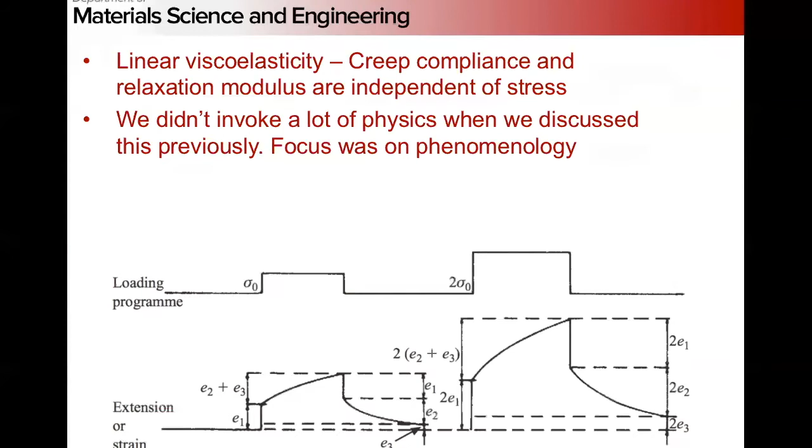And we didn't really discuss it before, but this rubbery plateau is really a function of the structure of the polymer, particularly molecular weight, right? If we have long molecules, right, they're going to tend to entangle, just as we talked about when we were discussing yield in polymers. And this is going to give the formation of physical links that restrict the molecular flow through the construction of these temporary networks.

And remember back when we did rubber elasticity, we said not all crosslinks are created equal, right? Some links are temporary slippages versus pure chemical crosslinks. And we discussed how modern rubber elasticity theories like the Boyce-Arruda work and the Ball, Doi, and Edwards models accounted for this, whereas the Mooney-Rivlin model that we talked about and other models assumed a fixed distance between these crosslinks. So it all ties back to our theory of rubber elasticity and our theory of polymer yield and flow.

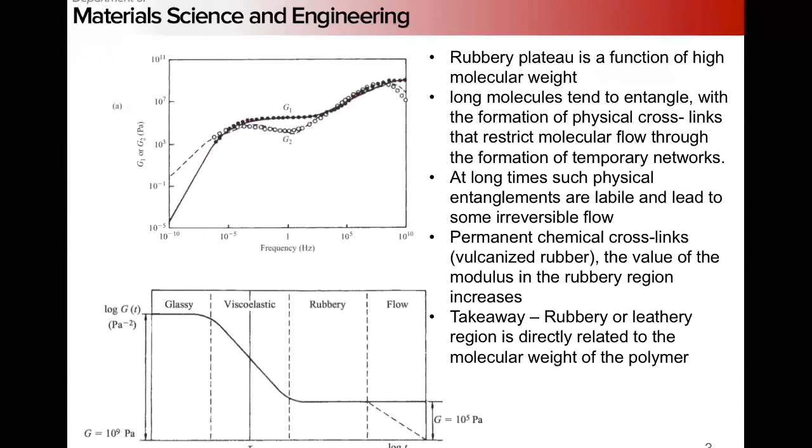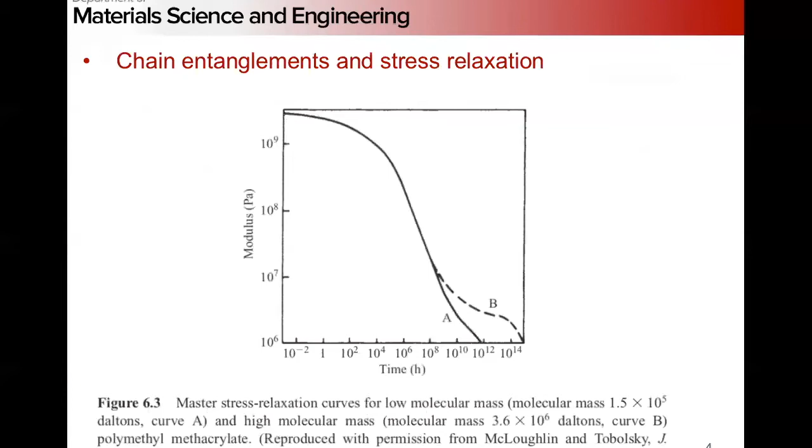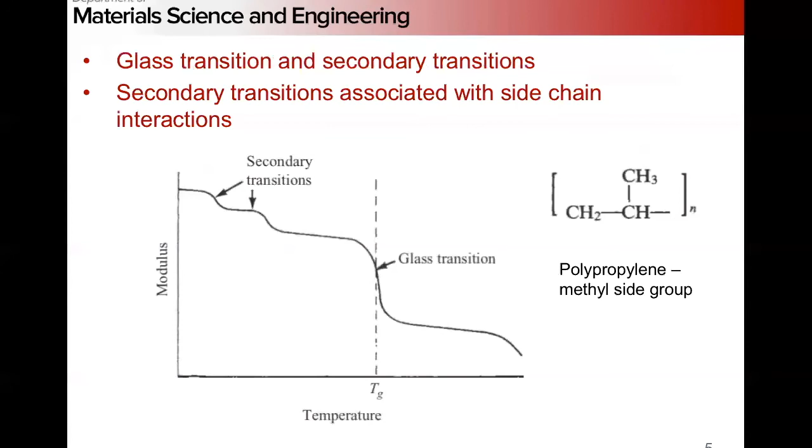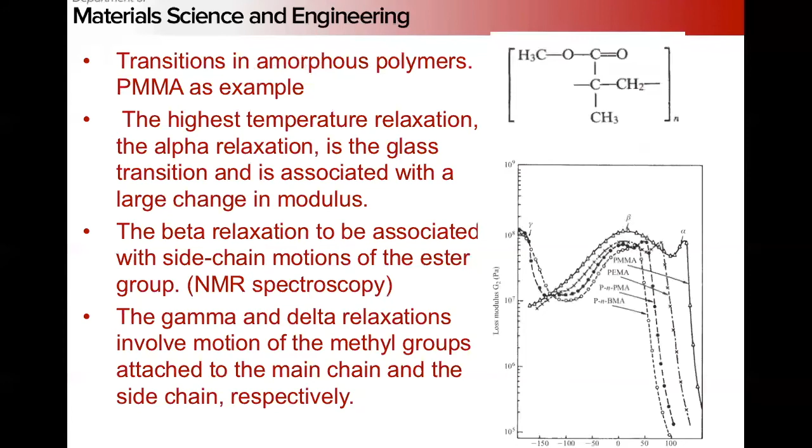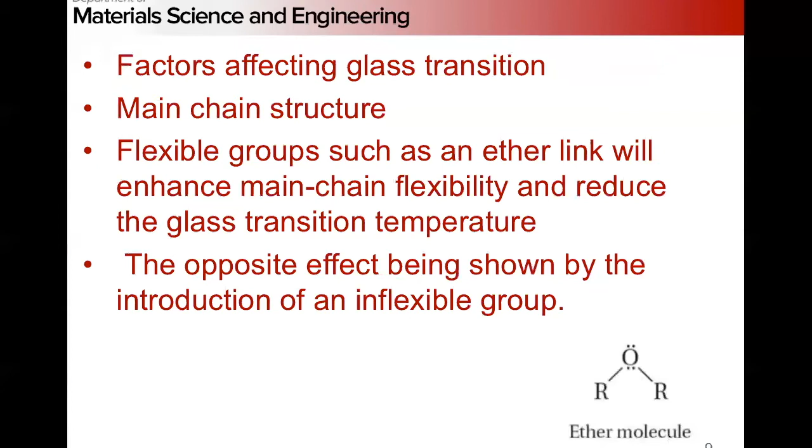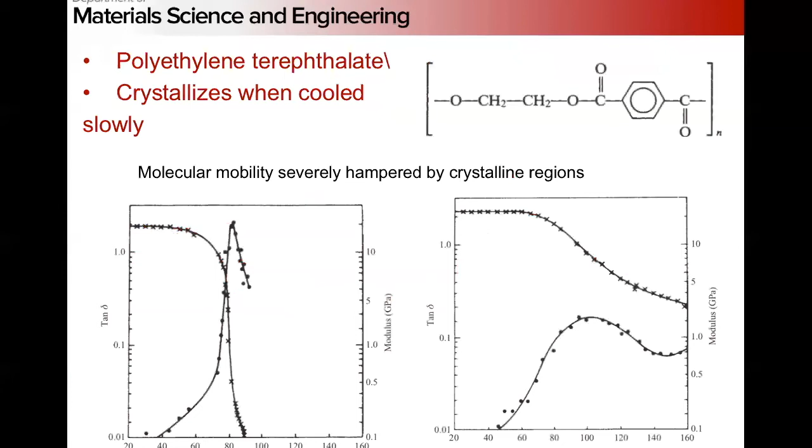So you've got that oxygen with two side groups coming off here. This has a more significant degree of freedom than these terephthalate type structures, where you now have these big benzene type rings. This gives you a more rigid polymer chain, and is going to have a higher glass transition than a more flexible chain.

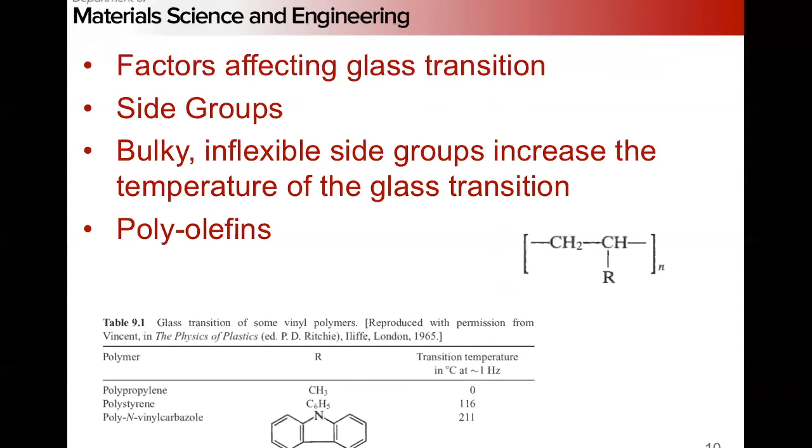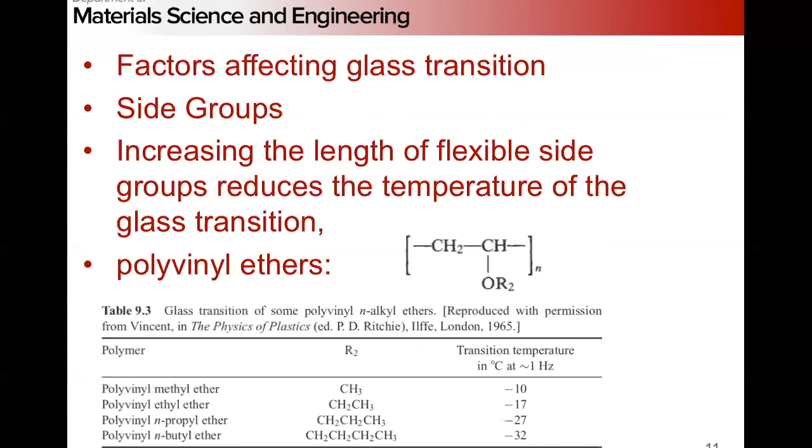And so basically, as we increase the number of these chains, we can increase the number of methyl groups in our side chains, and we can reduce our glass transition. Of course, it's going to depend on the structure of the main chain itself and the structure of the exact side chains, how drastic that effect is going to be.

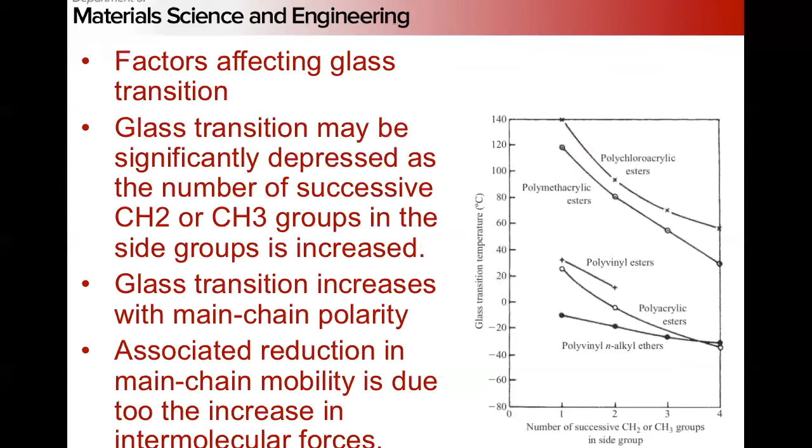The last structural thing we need to worry about is the main chain polarity, how polar the bond is. Polyethylene, for example, is just carbons with a whole bunch of CH2 strung together, very nonpolar. So we're going to have a lower glass transition than something that has higher polarity, stronger intermolecular forces, which gives us a decrease in chain mobility and an increase in the glass transition.

Okay, so I don't want to embarrass myself more by going into deeper details of polymer structure, other than those main trends to keep in mind. But in reality, it all comes down to the simple idea that the more interactions you have, the harder it is, the more likely you are to form physical links, the higher your glass transition temperature is going to be. The more flexible and easier for the chain to move, the lower your glass transition temperature is going to be.

Okay, so when we talked about viscoelasticity, we did not explicitly talk about temperature dependence at all. So here we need to bring that in. There are some practical and scientific aspects of the temperature dependence that we want to think about. From a practical point of view, it's typically not possible from a single experimental technique to measure the complete range of frequencies to evaluate the relaxation spectrum at a single temperature.

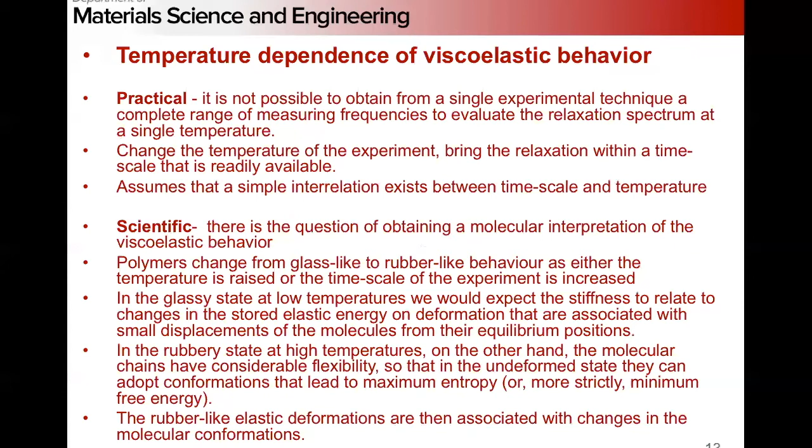So we have to find something that balances these two considerations out, right? So in this rubbery-like state, our deformations are really going to be associated with changes in molecular configuration or conformation. I have to be careful because configuration and conformation mean very different things to polymer scientists.

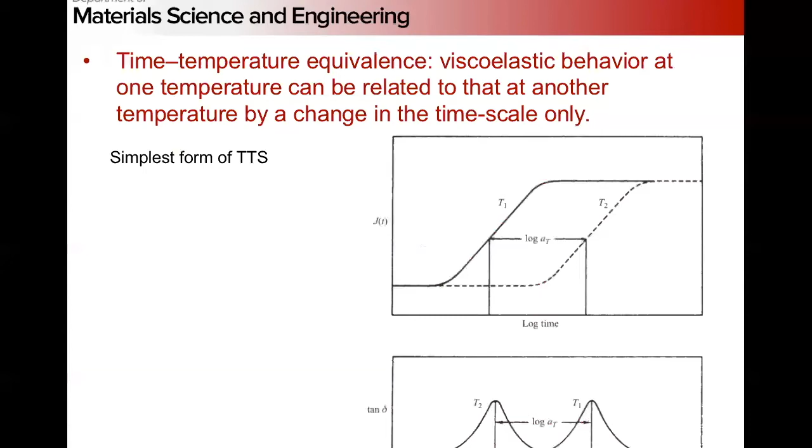Think about it for a second. Do you expect it to be more compliant at higher temperatures or less compliant? More compliant, right? So a faster creep deformation at higher temperatures.

So basically the idea here is we measure the compliance as a function of time for multiple temperatures. These curves can then be shifted to where they overlap and plugged together to form a master curve. Then, based by the amount that we have to shift these to bring them into coincidence, we know what the shift is going to be as a function of temperature, how we have to move this curve as a function of temperature to get our creep compliance for our temperature of interest.

So we want to record this variation of the shift factor with temperature, because this is an important validation for whatever theories that we come up with, right? Does our shift going to match what was observed experimentally?

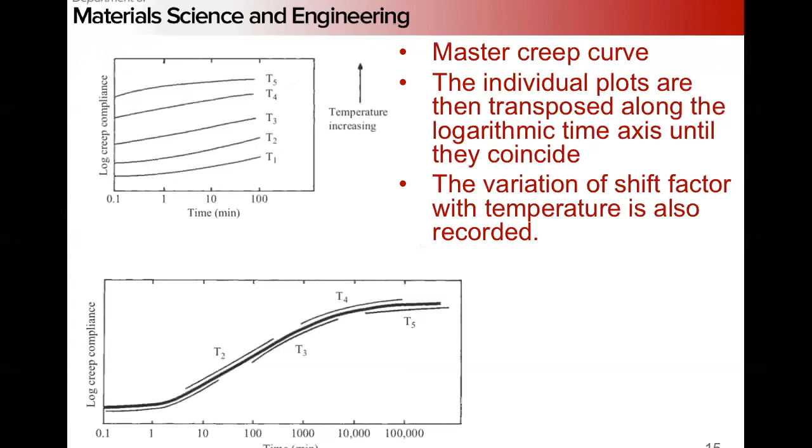So how does this work for polymers? It's pretty easy to think about in metals when we're talking about diffusion creep, in terms of vacancy diffusion, hopping from one atomic site to another. It's a little more abstract when we're thinking about the motion of these big molecules, these big sorts of changes.

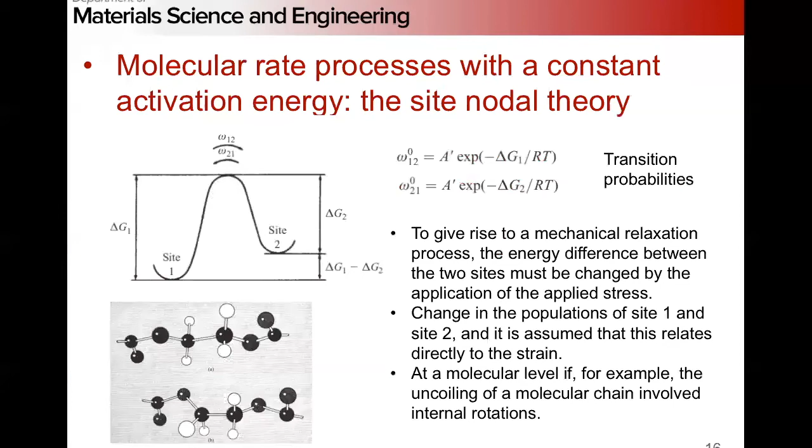Okay, so we're going to do a little bit of algebra now. So if we assume that our applied stress causes a small shift in the free energy - this is our free energy change, this is our applied stress - this parameter is going to have the units of volume to make everything balance out.

But we can rewrite our transition probabilities in terms of the stress. And now we can go through just like we did before and do rate equations for site 1 and 2, and then combine them together in terms of a total change in occupancy, this little n here, as a function of stress and temperature. And so we get a differential equation that links our change of occupancy with our stress and temperature.

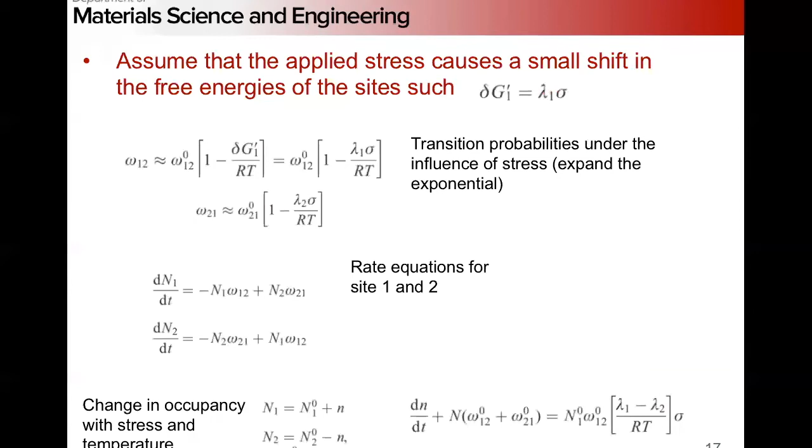So we have to make another assumption and assume that our change of strain is due to a change of the site occupancy. So our total strain we have broken up into an unrelaxed strain, or our instantaneous elastic response, our Hookean elastic response, and then the strain due to these changes of conformations, where this is our site fraction.

And if we consider what we have here for our previous slide for our transition model, and we look at the strain that we derived for a Kelvin-Voigt model, we basically - people said, oh, they're the same form, right? We have differential equations in the same form. Just a reminder that the Kelvin-Voigt is a spring in parallel with the dashpot.

And the relaxation time of the Kelvin-Voigt model is 1 over that B parameter. So if we have our equations that are of the same form here, our B parameter looks kind of nasty like this with these exponentials and the difference here between the activation energy.

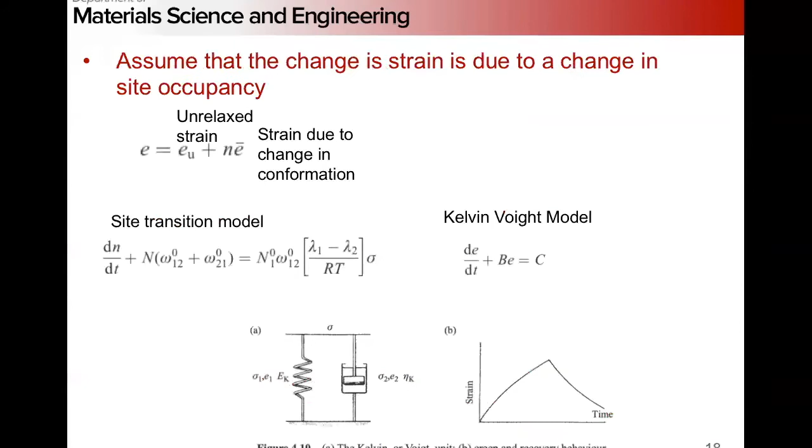So this seems like a convoluted process, right? Why did we go through this? Basically, what we're trying to do is we had this Kelvin-Voigt model that was purely empirical, and now we've been able to look at it from a thermodynamic point of view and assign a physical interpretation to those parameters.

So how does this help us get to our shifts? That was our big thing—why did we start this out? At the end of the day, we come back to something that's Arrhenius. These are equations we're completely familiar with. So because it's Arrhenius, we can use our classical thermodynamics to determine this shift factor.

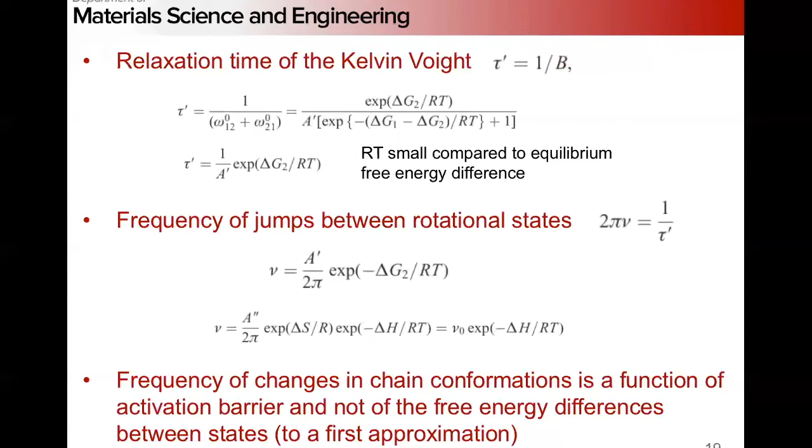We have here a change in enthalpy—our frequency of jumps between these states is related to an enthalpy term. We know how to relate enthalpy to the frequency and temperature, so we can think about our changes in frequency at two different temperatures and extract the shift parameter.

And then, once we have our shift factor, we can also relate the activation energy for the process by plotting this on a log of our shift factor versus reciprocal of temperature. That will give us our activation energy for the chain relaxation processes of interest.

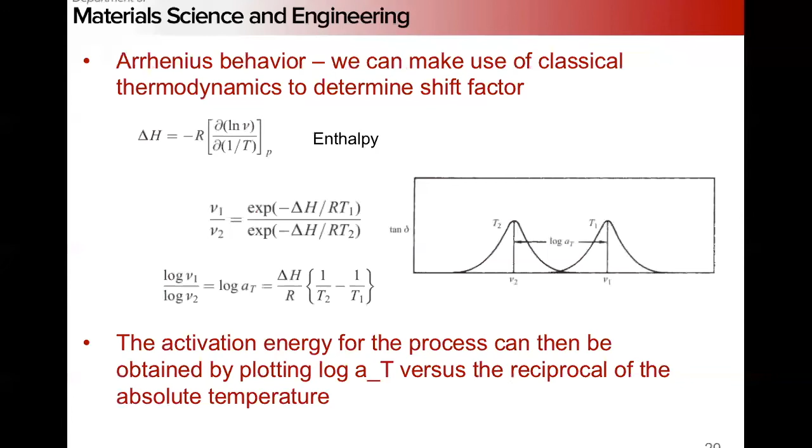So it's kind of an interesting approach—we're starting with some simple thermodynamic assumptions and an empirical model, and making a generalization of how to interpret these shift factors. So what are the big assumptions that we need to consider?

Here we're really assuming that the relaxation processes have a constant activation energy. If activation energy changes, or we have a mechanistic change of these relaxations, this approach definitely won't work.

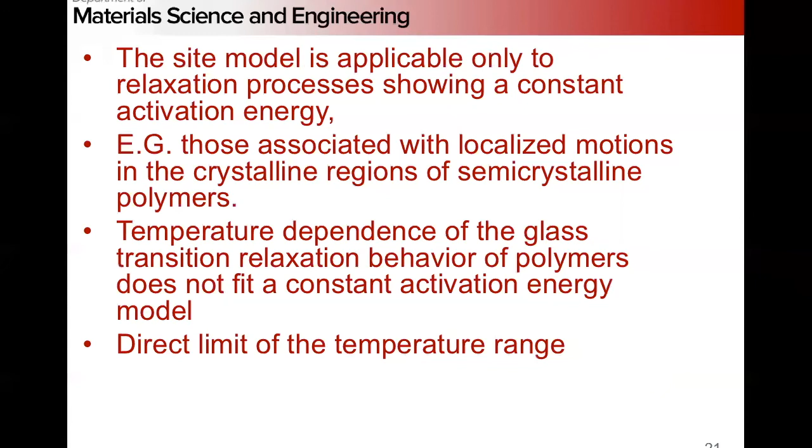And the observation is that at high temperatures, there's an approximately high compliance, this rubbery compliance. At intermediate temperatures, there's this frequency-dependent viscoelastic response. And again, at low temperatures, we have an approximately flat, glassy response.

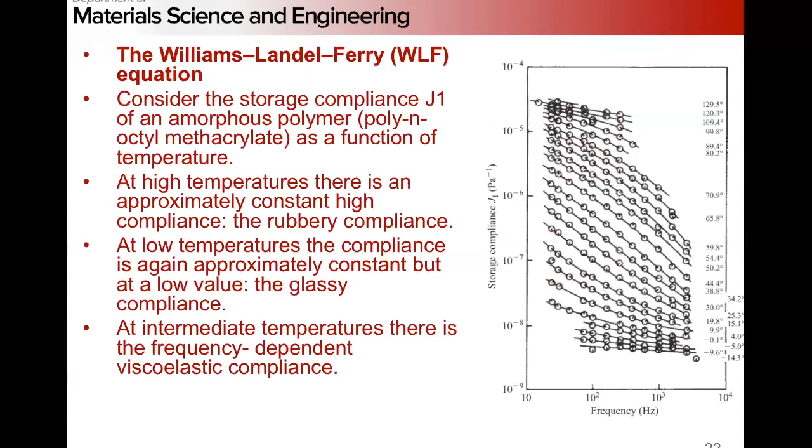And they took all this data and put it together, and this shows the horizontal shift factor as a function of the storage compliance, giving a curved behavior that looks like this. At low compliance, which corresponds to low temperatures, of course we have a larger shift than at high temperatures, high compliance.

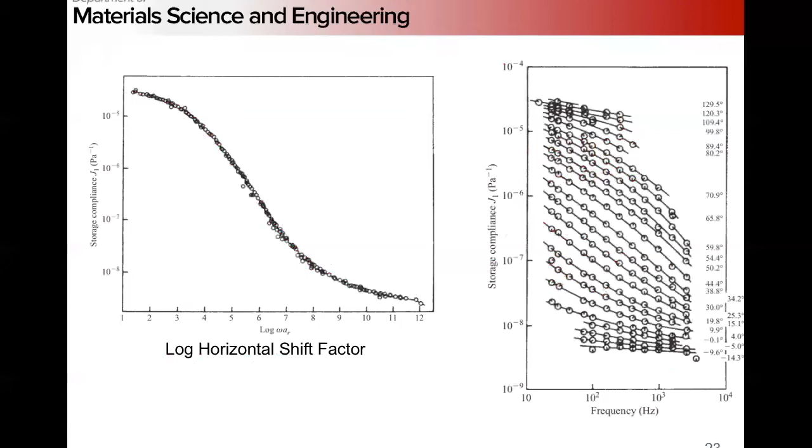But what they found is if they measured this shift factor as a function of temperature for a huge number of different amorphous polymers, they all fit this same relationship. They all had shift factor versus temperature curves that, when normalized, would fall onto this same sort of rule. Now, this is completely an empirical relationship—this was just done by curve fitting.

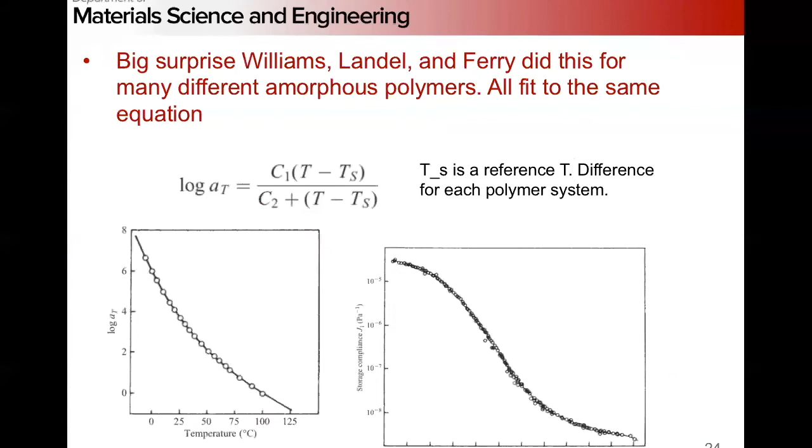So this TS here is a reference temperature that's going to be different for each system, and these C1 and C2s are just fit constants. Of course, whenever we see an empirical relationship, the natural question is, does it have some kind of fundamental interpretation?

And so if we measure from dilatometry, our thermal expansion is a function of temperature. Remember, we see a change in slope near the glass transition.

And of course, the faster the cooling, the less well-defined this point is. At higher cooling rates, this is much more of a smooth curve than an actual sharp point. But if we cool it slow enough, this TG really does approach a given point.

I think in the reading I assigned, they said the difference between a cooling rate of a degree per minute and a cooling rate of a degree per day only gives you like a couple hundredths degree Kelvin change in the position of the inflection. So it is possible to define a rate independent value of TG, and we can have a modified WLF where we put TG in here.

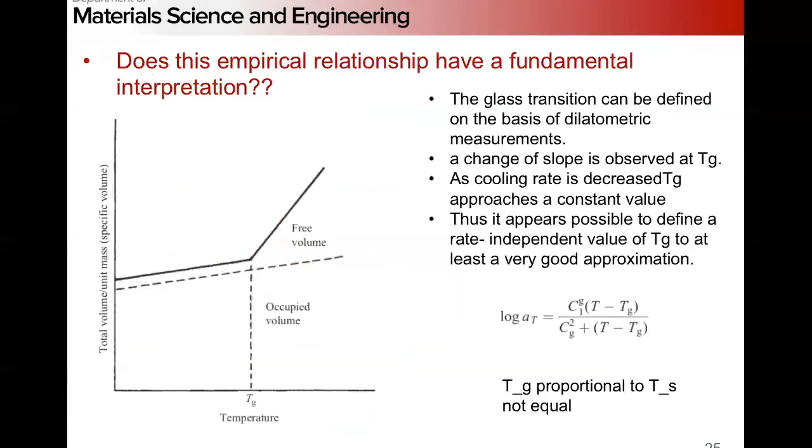So where are we going? We're basically going to try and do the same sort of thing and come up with a molecular interpretation for this WLF relationship, and come up with a reason why this completely empirical relationship has some sort of physical basis.

So we're getting into a little bit more polymer theory than I would like. But basically the idea here is that the total volume can be split into an occupied volume and the free volume components, and this occupied volume increases at a constant rate with temperature over the range of interest.

And at this discontinuity, the expansion of the free volume drastically increases. And the interpretation of this is that the molecular processes that control the viscoelastic behavior really begin to commence at the TG.

And it's not really just where their time scales become comparable to the measuring time scale, but it's below that. We really don't have any viscoelastic mechanisms, molecular processes that give rise to viscoelasticity below this.

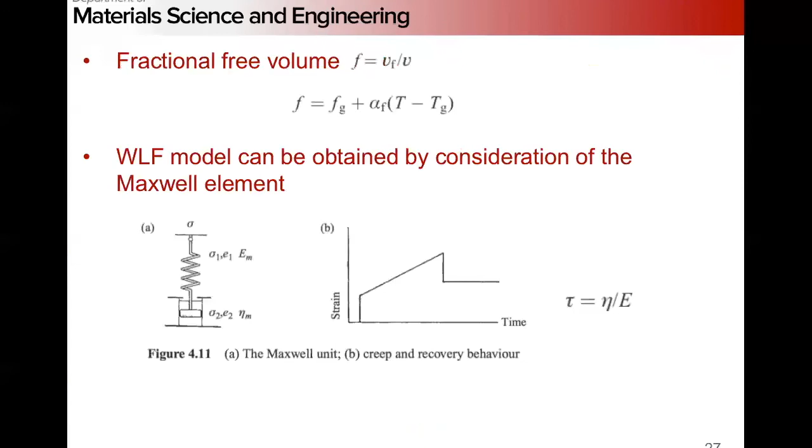But if we relate this shift to our F and F of G, recall this is our fractional free volume versus the fractional free volume at the glass transition, we can relate our shift as a function of our free volume.

We then plug this in. We get something that has our log shift versus a difference between temperature and TG, and this is basically recovering the WLF equation. So we assume we can rewrite that in terms of a viscosity, and we get this. So the WLF equation empirically makes a lot of sense from a perspective of talking about the Maxwell element.

Again, in my point of view, it still leaves a lot to be desired. This is still really empirical, right? At least with the two-site theory, we had some fundamental thermodynamics, a fundamental mechanism. Here, we're just saying, well...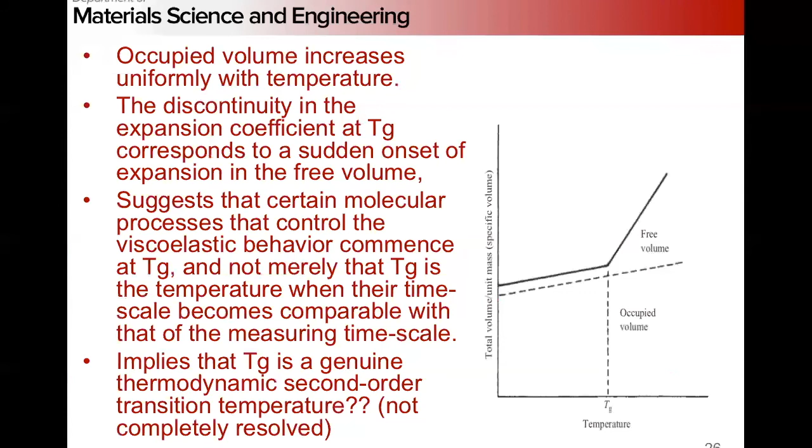But we never talk about, nowhere in the literature about this does it talk about what those specific processes are. Again, at least with the nodal site formulation, we can talk about rotational configurations and actual thermodynamic site jumps. And then we throw this all into how the viscosity is related to the free volume through an equation that a lot of people seem to take as more fundamental than a lot of others.

Some people in the polymer rheology world sort of take this as a given. Others say free volume models are garbage and you can't trust them, and you have to go back to very classical fluid mechanics type things. So from a personal perspective, I find this sort of unsatisfactory, but it's sort of a cornerstone of this...

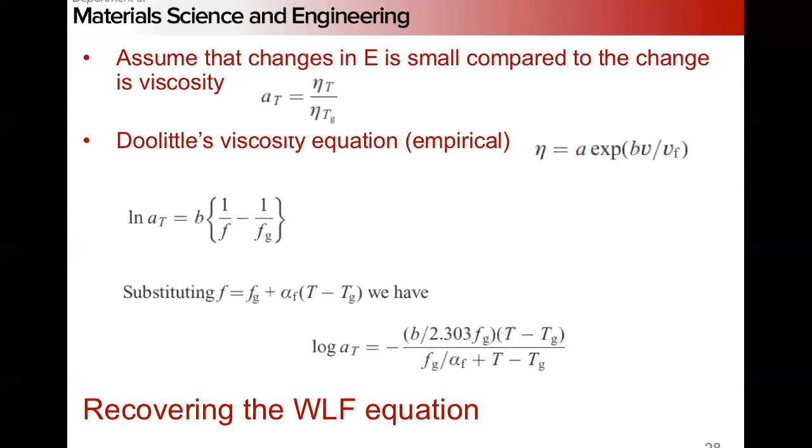time temperature dependence. Okay, so we have a couple slides that we're going to wrap up on Wednesday on nonlinear viscoelasticity. Remember, in linear viscoelasticity, the compliance and the modulus are independent of the stress. For nonlinear viscoelasticity, the creep compliance and stress relaxation modulus become explicit functions of the stress. So if we increase our stress, we're going to change our moduli values.

So that means our Boltzmann superposition doesn't hold, and all of the analysis becomes really nasty really quickly. The focus is not going to be on how to do the analysis, but on the fact that once you enter the nonlinear viscoelastic regime, the world gets really bad really quickly. That's why we spend so much time focusing on linear models from a theoretical point of view.

This is something that from the polymer mechanics point of view, there is not a lot of fundamental physics that describes nonlinear viscoelasticity. It's a lot of empirical models that make small changes to the linear equations that we look at.

So, okay, let's get moving and I'll wrap up very quickly. Nonlinear viscoelasticity: the idea is that in linear viscoelasticity, the compliance, creep compliance, and relaxation modulus are independent of the stress. So if we move into a nonlinear viscoelastic regime, the compliance and moduli are explicit functions of stress. The Boltzmann superposition doesn't hold. You can't just simply add up everything in the same way.

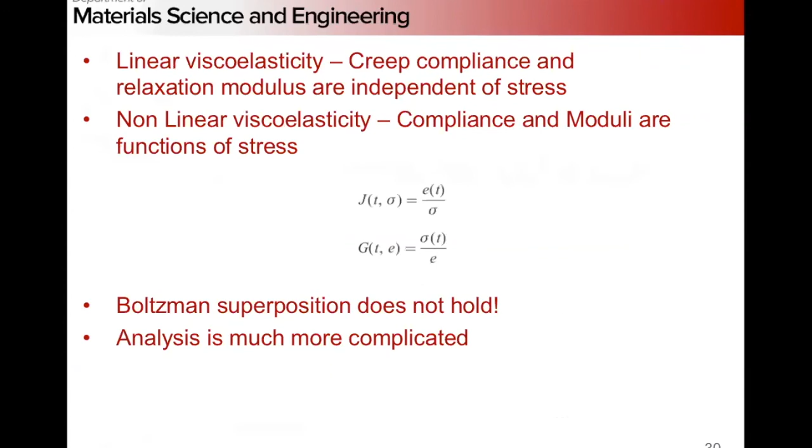Oh, this is the creep compliance and the relaxation modulus. So the engineering approach is basically to tabulate your data and interpolate. This is the way most things are done.

You do tests at different strain rates and at different temperatures, and then you put it all in a big table, and you let your finite element simulation interpolate between your curves. So this is how 99% of the analysis is actually done, because it involves a lot of testing, but conceptually it's straightforward. If you're interpolating, you have pretty good confidence that you're going to have something reasonable.

Doesn't work so good for extrapolation though. You go off the rails pretty quickly when you try to extrapolate from tabulated mechanical data.

The other approach is sort of modifications of the linear theory, and you can do that with differential approaches, where we take the differential equations that govern the different models—the Voigt, Maxwell, or the standard linear model—and you add an explicit dependence of the terms that you get on stress. So here's the differential equation for the standard linear model.

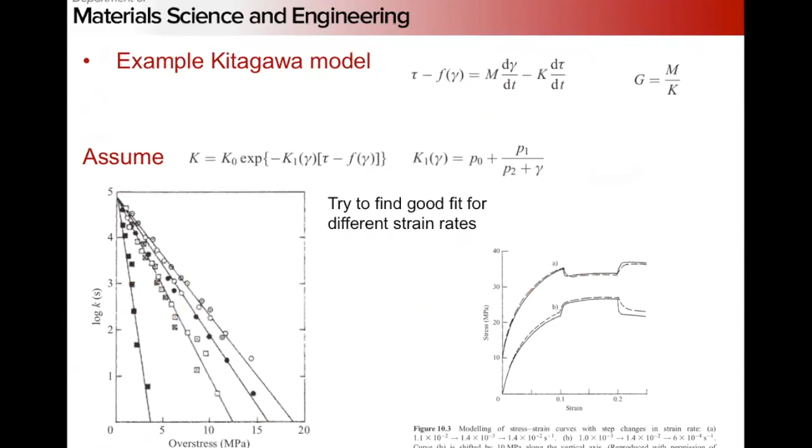Then the other approach is this huge family of integral models, where basically one approach is what Lederman did, making modifications of the Boltzmann superposition by putting an explicit stress dependence in. Pipkin and Rogers wrote stress as a function of the history of strain, and if you do that, you can get what he calls a creep function, which is a generalization of a compliance term. Then it gets a lot more complicated from here as you go out, with integral models with dozens of terms that are all sort of fit.

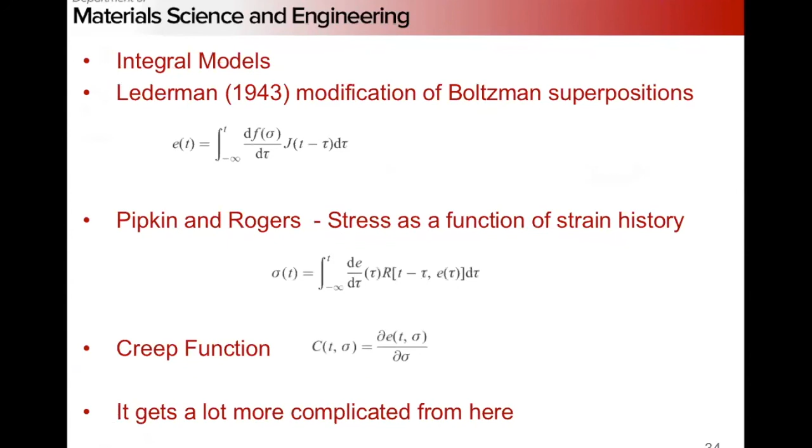Another approach is you can go back, analogous to how we looked at creep in metals, and develop the Eyring equation. Remember from PChem? It's about reaction rates in chemical kinetics. You express your strain rate as a function of your stress and the thermal enthalpy of your activation.

This strain rate can then be plugged back into the equations for all of your different models, and you end up at the end of the day with nasty sets of coupled nonlinear differential equations that have to be solved numerically. These are the standard approaches for how to handle nonlinear viscoelasticity. At the end of the day, you end up with integral equations or differential equations that can't be solved analytically, and you have to resort to a numerical solver such as a nonlinear finite element analysis to make some sense of it.

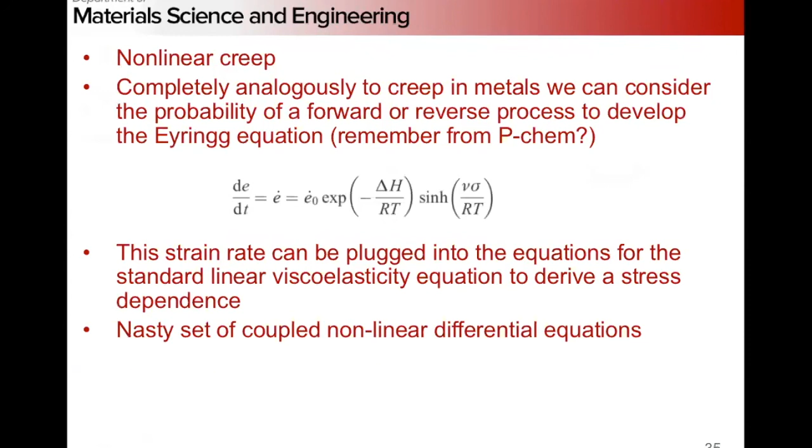Basically what people just do, the end result, is this sort of engineering or rheological approach is what people use most of the time. We just run what tests we can, tabulate the data, and interpolate between.